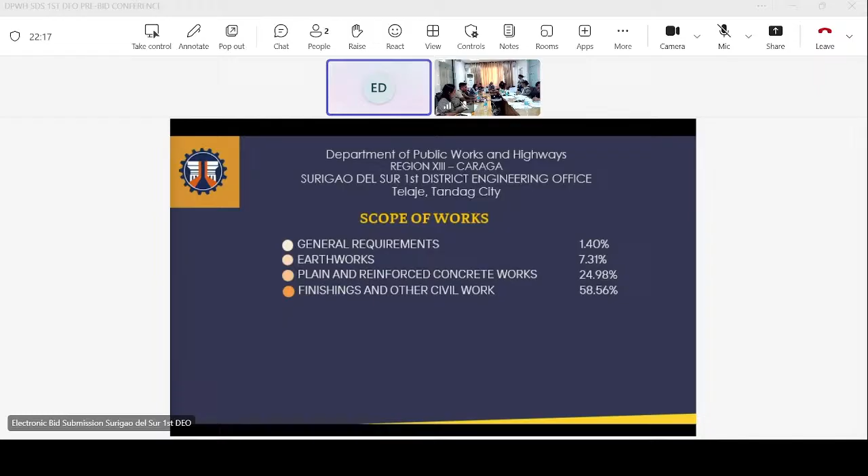Project scope: completion of multi-purpose building covered court. Project duration 193 calendar days. For the scope of works: general requirements 1.4%, earthworks 7.31%, plain and reinforced concrete works 24.98%, finishings and other civil works 58.56%, plumbing works 4.77%, electrical works 3.68%, with a total of 100%.

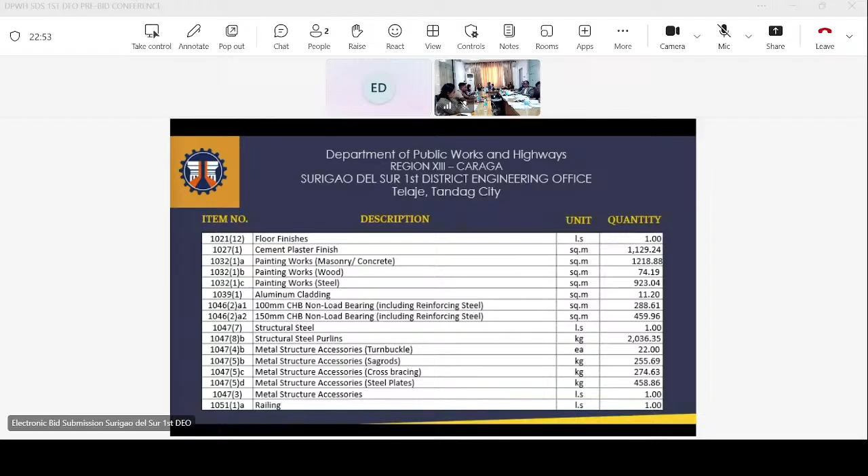For Part A, general requirements, Part B, earthworks, Part C, plain and reinforced concrete work, the item number, description, unit, and quantity are shown. For Part D, finishings and other civil works, the item number, description, unit, and quantity are shown. For Part E, plumbing works, Part F, electrical works, the item number, description, unit, and quantity are shown.

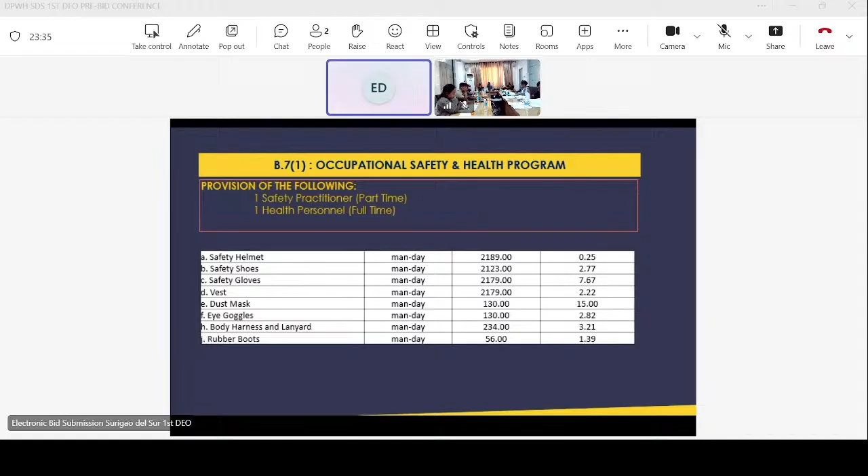For B.51 project billboard, we have 1 unit 4x8 DPWH tarpaulin and 1 unit 8x8 COA tarpaulin. For B.71 occupational safety and health program, we have 1 safety practitioner part-time and 1 health personnel full-time. The materials, unit, and quantity are shown. For the minimum equipment requirement, we have one dump truck.

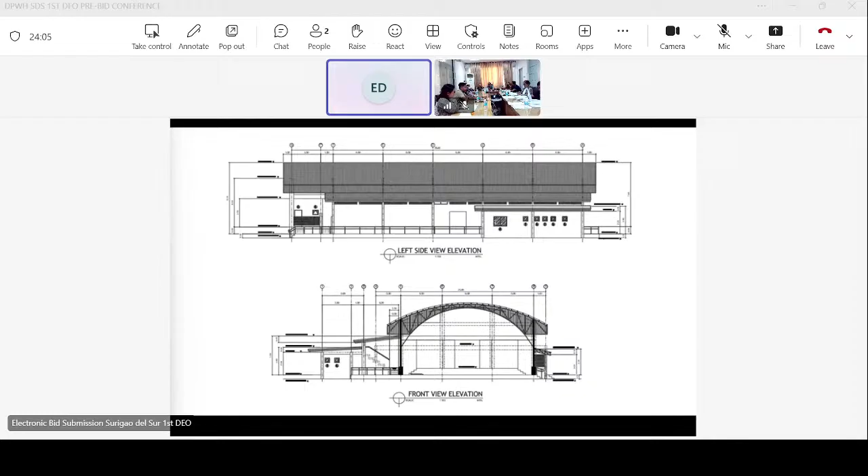For the plans, for the architectural, we have the perspective and site development plan, the floor plan, the left side view elevation and front view elevation, the rear view elevation and right side view elevation, longitudinal section B and cross section A, longitudinal section C and wire mesh window detail.

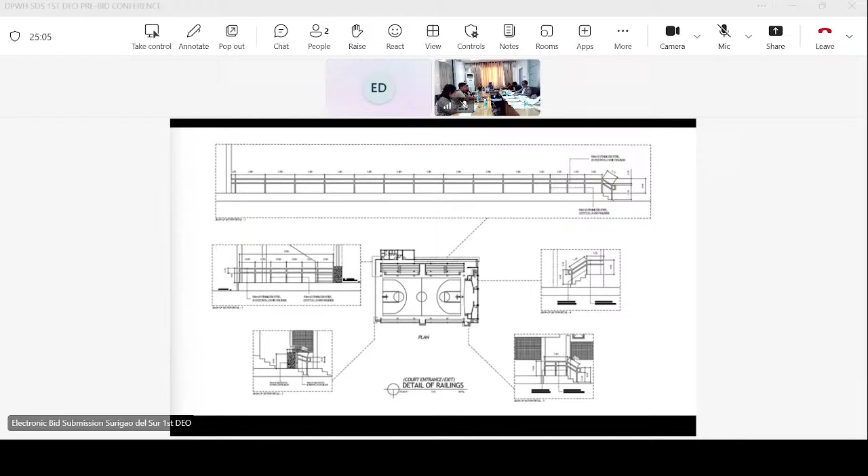Schedule of doors and windows. Reflected ceiling plan. Roof plan 1, roof plan 2, and roof plan 2. Ceiling typical detail. Detail of railings for the left side bleacher. Spot detail for the railings. Detail of railings for the court entrance and seat. The ceiling detail for the stage.

And for the structural, we have the foundation plan, the tie beam and wall footing plan, column footing details, tie beam section detail and stair footing details, wall footing, the roof beam plan, arc beam detail elevation and beam section detail and rafter details.

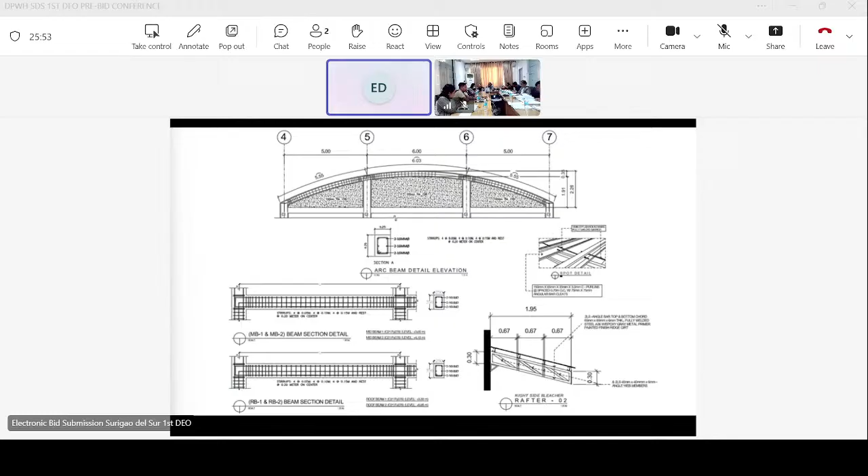The roof framing plan 1, roof framing plan 2, and roof framing plan 3. The ridge, girth, and full truss details. The steel girth, rafter, and half truss for the bleachers details. Section detail for the bleacher.

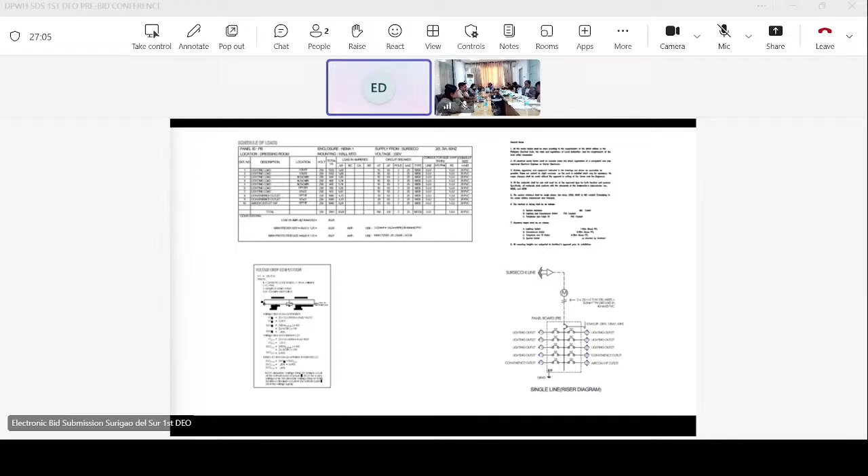For the plumbing plans, we have the water line layout plan, the sanitary line layout plan, storm drain layout plan, the septic tank, catch basin, service tank connection details. And for the electrical, we have the lighting layout plan, the power layout plan, and the schedule of loads and the single line riser diagram. That would be all, thank you.

Okay. Comment from the panel: from our pre-procurement, we have to include in the program of works the computation of calendar days. Then secure a resolution on the demolition of the existing building, care of the end user for the processing of the demolition permit. Then update plans of ceiling details. And then on BOQ, quantities of items of Part C must be changed based on the program of works. Then reflected on the BOQ must be DPWH-accredited project engineer and construction safety training certificate for safety officer.

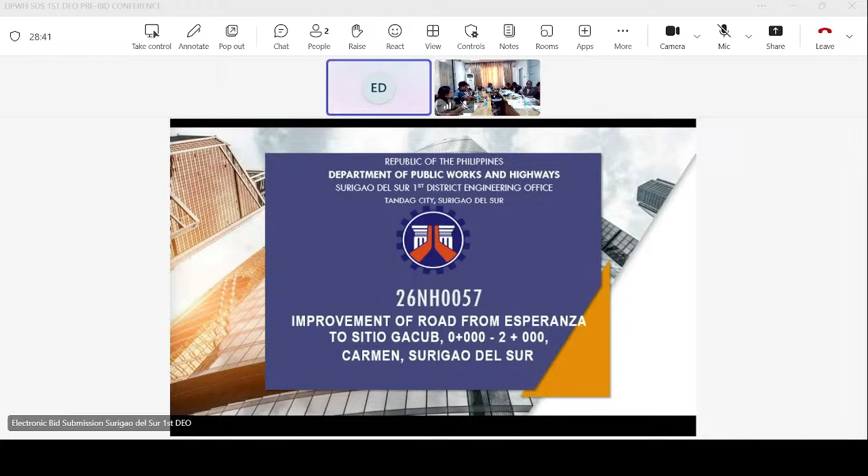Station 0+000 to 2+000, Carmen, Surigao del Sur. Appropriation 70 million, ABC 69,300,000, location at Carmen, Surigao del Sur.

For CW1, construction of concrete road, and CW2, construction of bridge. For construction of concrete road: facilities for the engineer 0.63%, general requirements 1.42%, earthworks 12.54%, sub-base and base course 4.85%, surface course 28.33%, drainage and slope protection structure 20.35%. For CW2, construction of bridge: drainage and slope protection works 2.64%, miscellaneous 1.81%, materials details 0.02%, total 100%.

Project length for road is 1.97 kilometers, for bridge 30 meters. Project scope: road and bridge. Contract duration 138 calendar days. Date of bidding July 22, 2026.

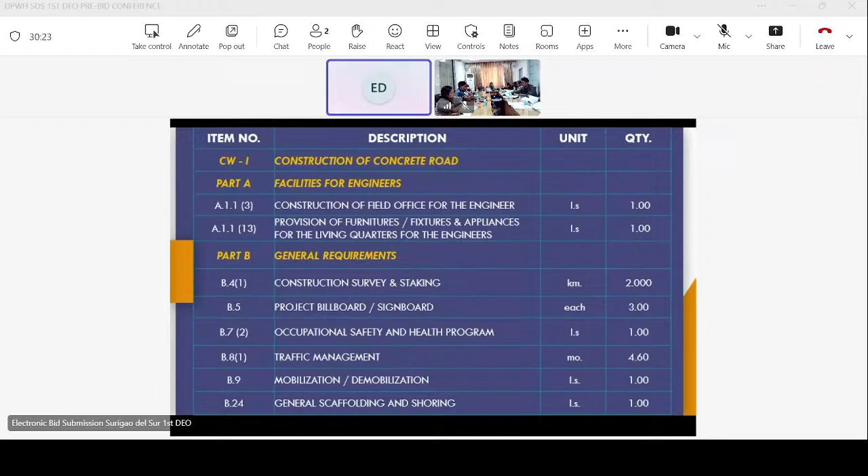For CW1, construction of concrete road: Part A, facilities for the engineer; Part B, general requirements. The item number, description, unit, and quantity are being shown.

Breakdown for construction of field office for the engineer: 1 unit field office bunkhouse type, and for B.5, project billboard/signboard: 3 units 4 feet by 8 feet tarpaulin for DPWH, 3 units 8 feet by 8 feet tarpaulin for COA.

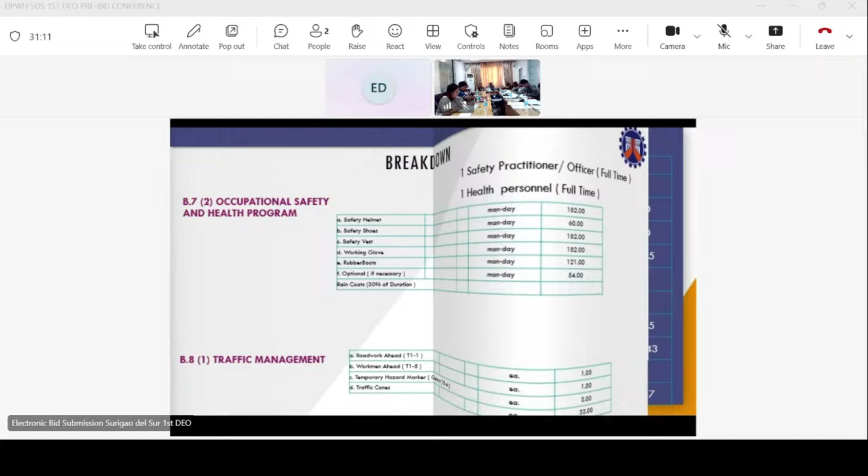For Part E, surface course, and Part F, drainage and slope protection structure, the item number, description, unit, and quantity are being shown.

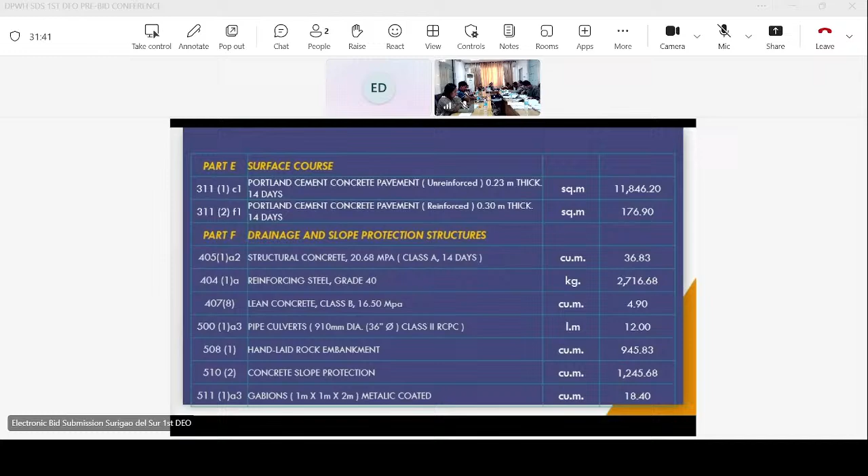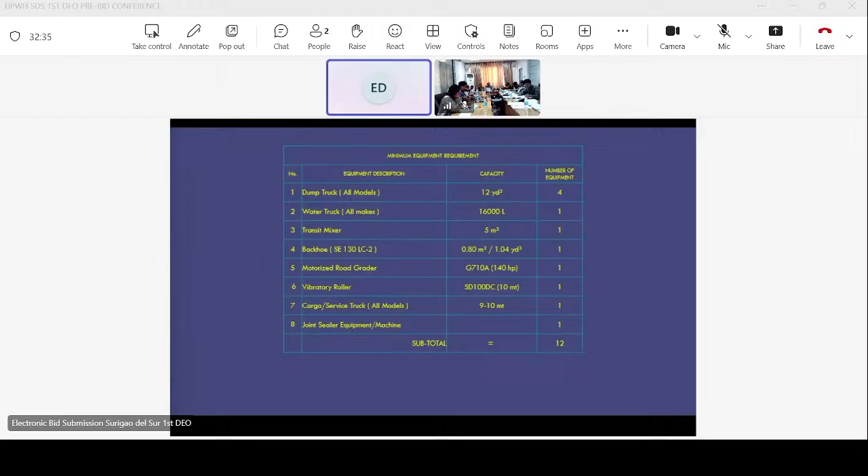For minimum equipment requirement, we have 4 units dump truck, 1 unit water truck, 1 unit transit mixer, 1 unit backhoe, 1 unit motorized road grader, 1 unit vibratory roller, 1 unit cargo service truck, and 1 unit joint sealer equipment machine.

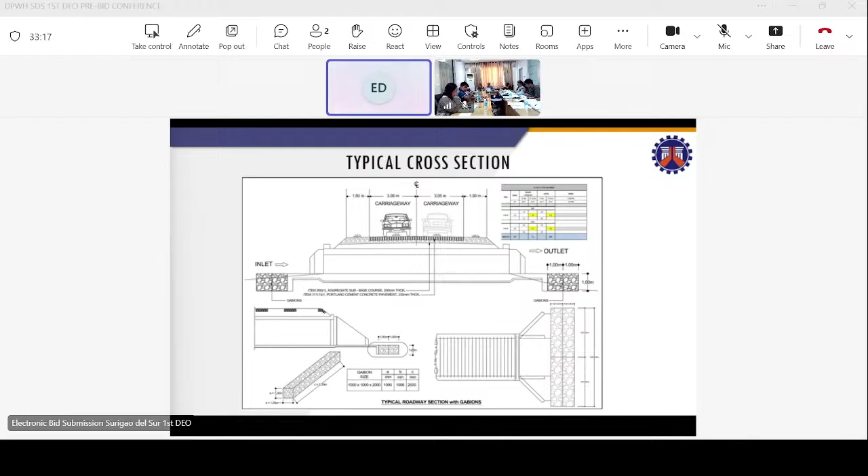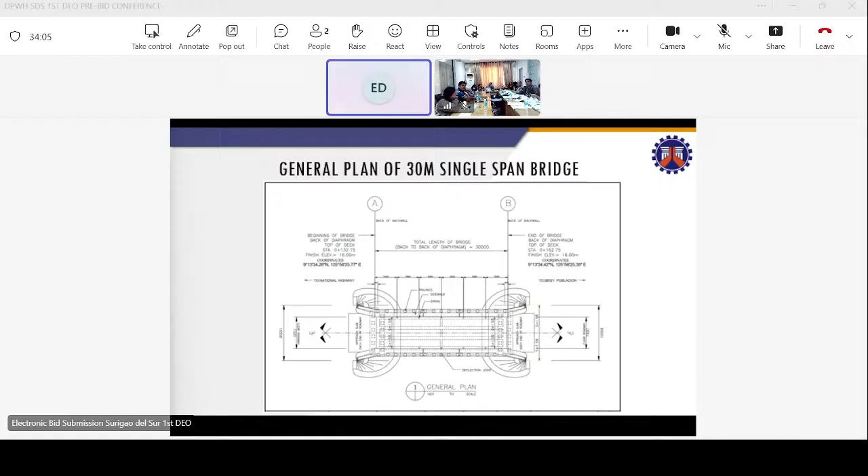General plan of 30 meters single span bridge. And 30,000. So, is this the point?

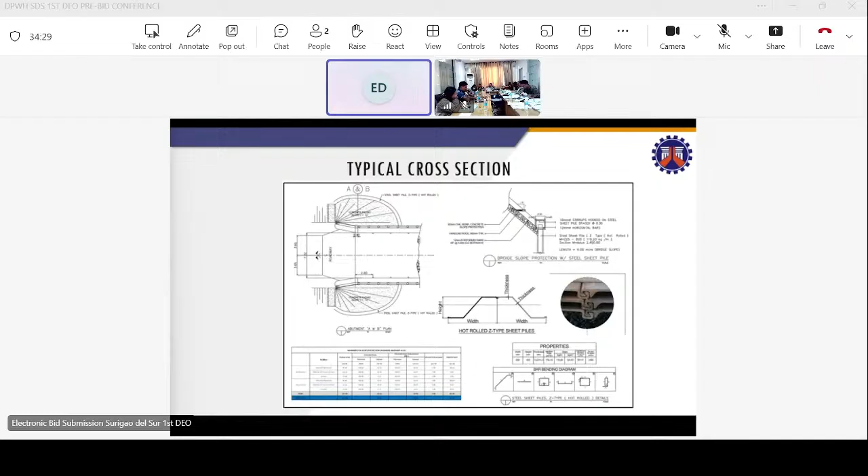For plan and profile, station beginning at station 0+00, and at station 2+012. That's all, sir.

Coming from the people: from our pre-construction proceedings, we have provided gabions as protection on the side of the apron, end to the outlet and inlet of the box culvert, in replacement of concrete shoulder.

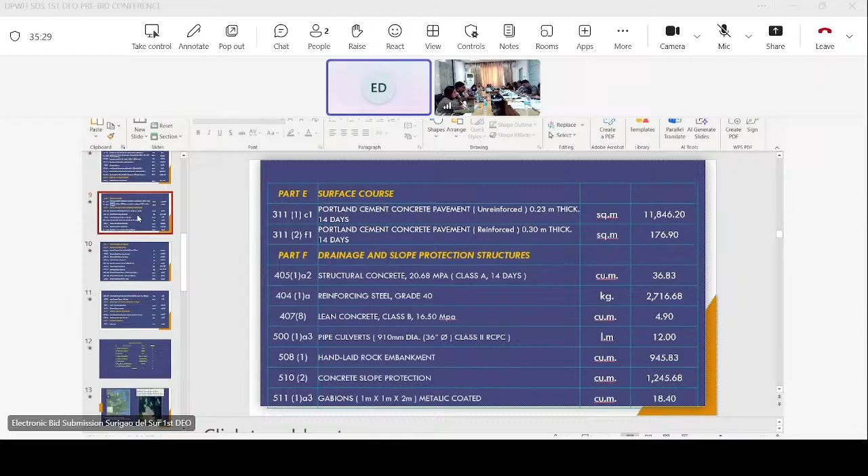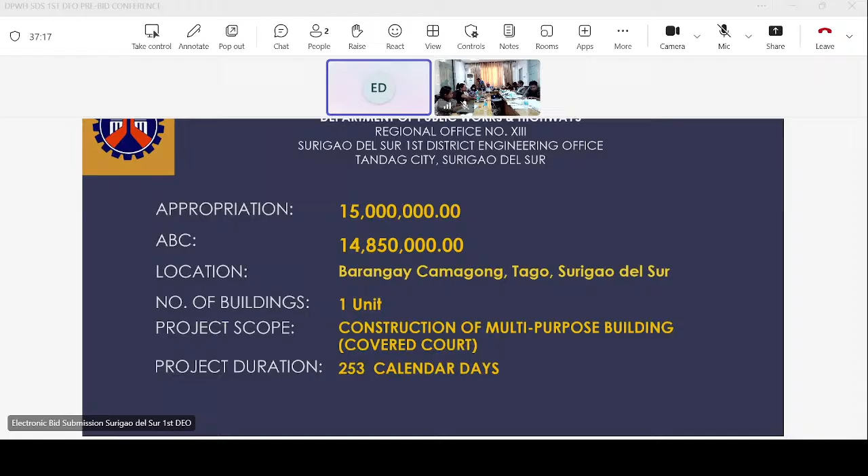Scope of work: general requirements 1.25%, earthworks 11.14%, plain and reinforced concrete work 33.95%, finishing and other civil works 47.90%, plumbing works 3.51%, electrical works 2.24%, with a total of 100%.

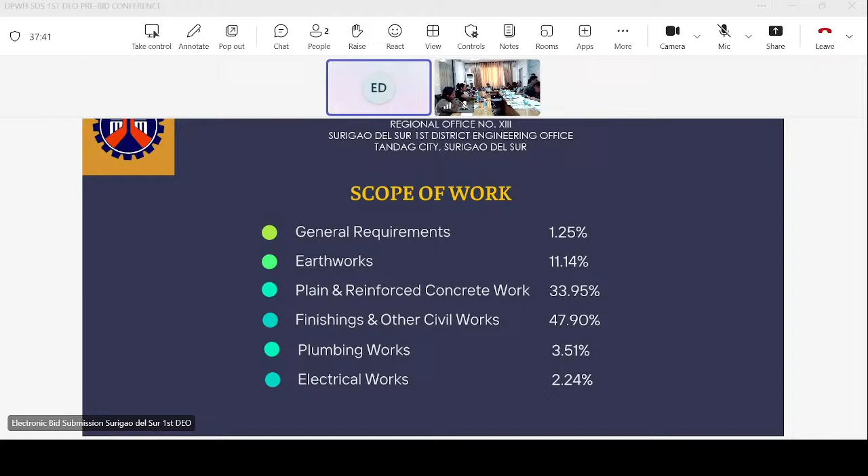For Part A, general requirements, Part B, earthworks, Part C, plain and reinforced concrete work, the item number, description, units, and quantities are as shown.

Next, for Part D, finishings and other civil works, Part E, plumbing works, and Part F, electrical works. The item number, description, units, and quantities are as shown.

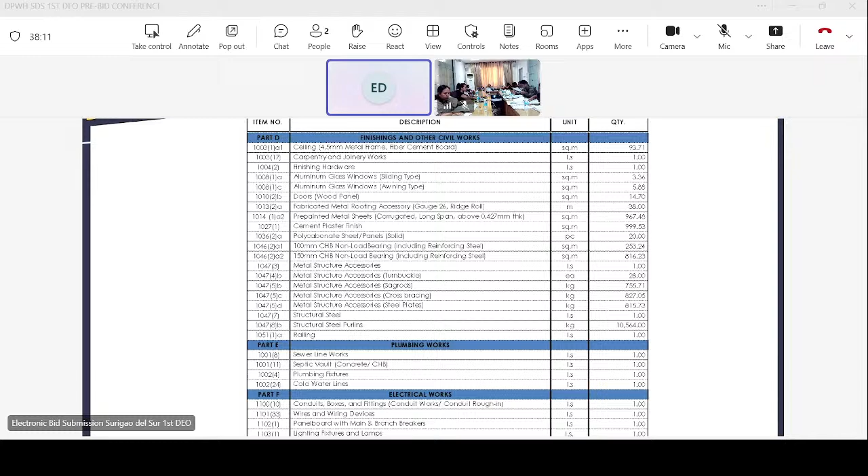For minimum equipment requirement, we have 1 dump truck.

Breakdown for permits and clearances, we have BFP, zoning, master plumber, and PEE.

For project billboard, we have 1 unit, 4x8 DPWH tarpaulin backed with marine plywood and 1 unit 8x8 COA tarpaulin backed with marine plywood.

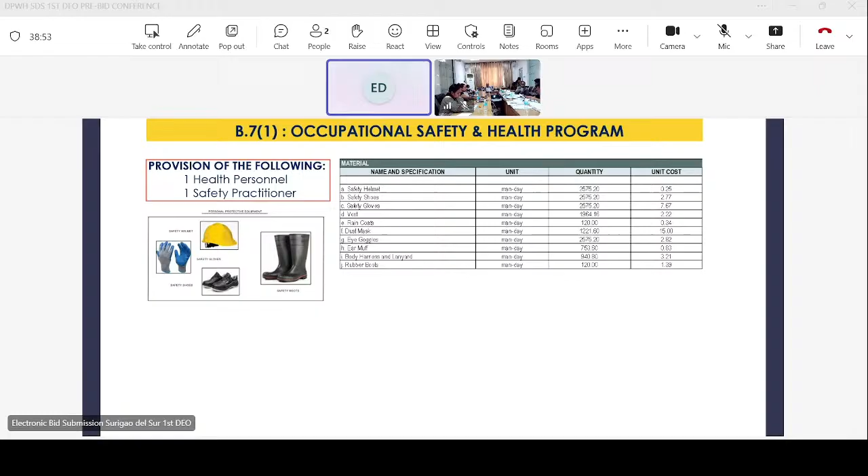For occupational safety and health program, provision of the following: 1 health personnel, 1 safety practitioner. Materials, name and specification, units and quantities are shown.

For architectural plan, we have perspective, site development plan, vicinity map, the table of contents.

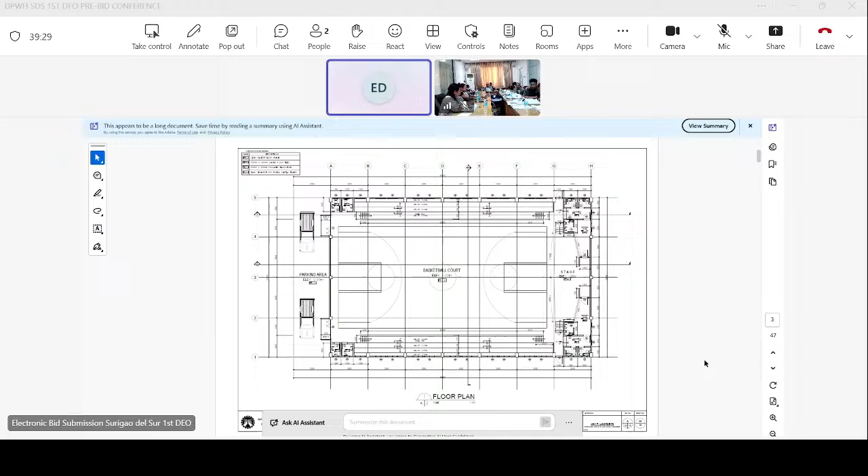Next, we have the floor plan, front elevation, left side elevation, rear elevation, cross section AA.

Longitudinal section BB, longitudinal section CC, schedule of doors and windows, reflected ceiling plan, the isometric ceiling detail, and upper fixed glass detail, polycarbonate detail.

Stage ceiling framing plan, ceiling framing 1 and 2, the isometric ceiling frame, walkway railing detail, ramp railing detail, and stair railing detail.

Next, we have the roofing plan. For structural, we have foundation plan, footing schedule, column footing details.

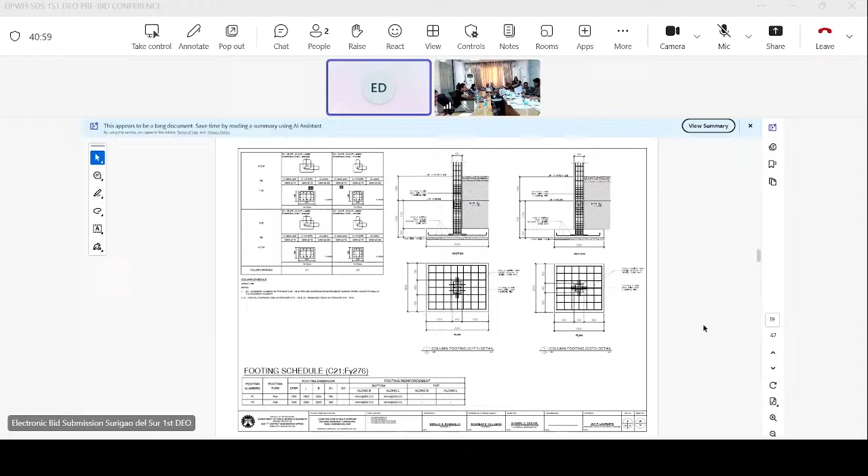Next, we have grade beam plan, grade beam schedule, and the typical detail of footing, wall footing.

Next, we have the mid beam plan, mid beam schedule and wall footing detail.

Roof beam plan, roof beam schedule, the upper roof beam plan, upper roof beam schedule.

Bleacher detail section and lintel beam detail, stiffener column detail, and canopy detail.

Next, we have the roof framing plan, truss 1 detail, truss 1A detail.

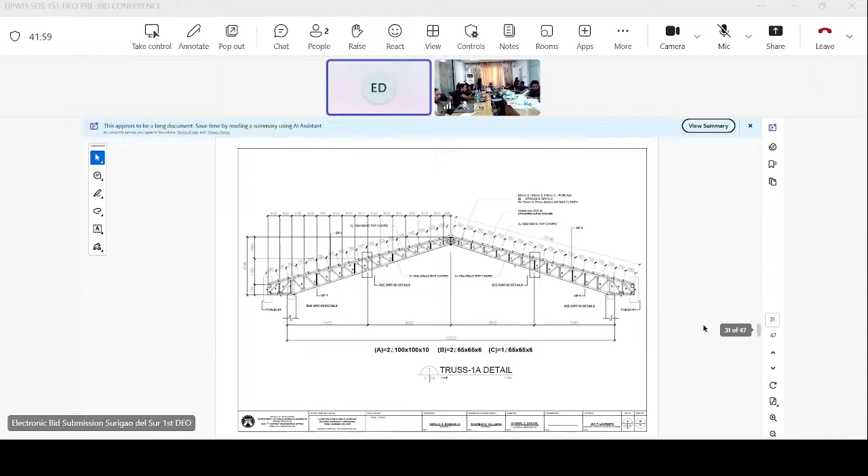Next, we have the fascia detail 1 and 2, girt detail 1, 2, and 3.

Next, we have the C-purlin details, roof panel side lap details, detail of purlin splice, detail of sag rod, connection of cross bracing.

Base plate detail, gusset plate detail.

Next, for plumbing, we have water line layout, isometric view for water line layout, sewer line layout.

Isometric view for sewer line layout, storm drain and downspout layout, isometric view for storm drain and downspout layout.

Next, we have the septic tank detail and section, and catch basin detail and section.

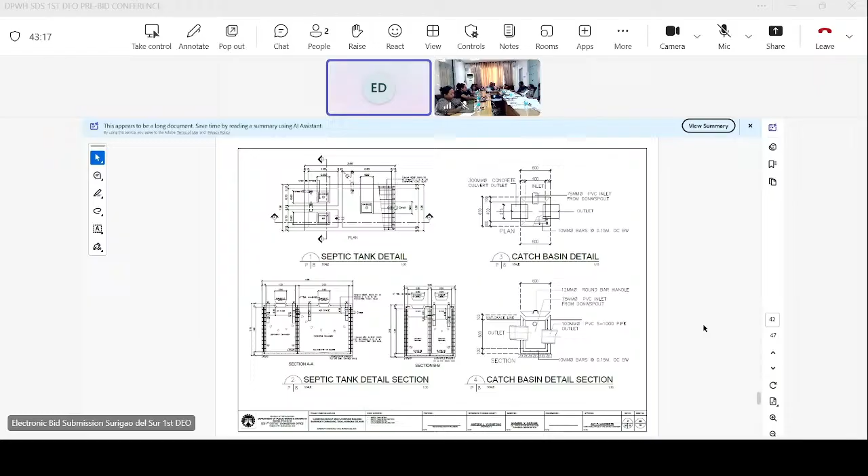Next, for electrical plan, we have electrical lighting layout, the electrical power layout, schedule of loads, voltage drop computation, single line riser diagram.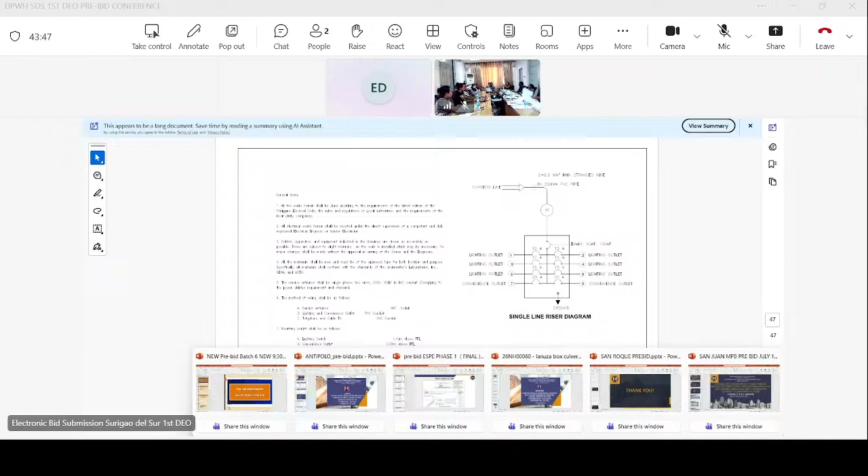Comment from Mark Repro: the only comment is to include in the program of works the computation of calendar days.

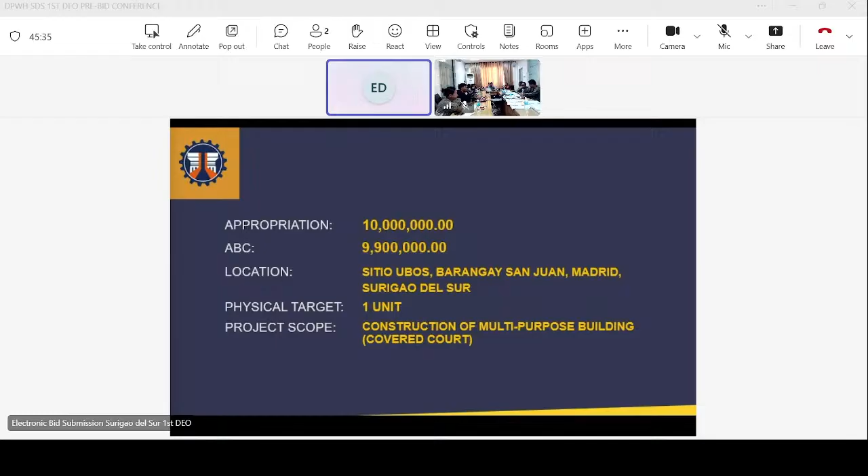Appropriation of 10 million and ABC of 9,900,000, and location at Sitio Ubos, Barangay San Juan, Madrid, Surigao del Sur. Physical target of 1 unit and project scope of construction of multi-purpose building covered court. Project duration of 183 calendar days.

For our scope of works, we have facilities for engineer 1.46%, general requirements 2.38%, earthworks 2.60%, plain and reinforced concrete works 30.62%, finishing and other civil works 55.68%, electrical works 2.36%, plumbing works 3.35%, and mechanical works 1.54%, for a total of 100%.

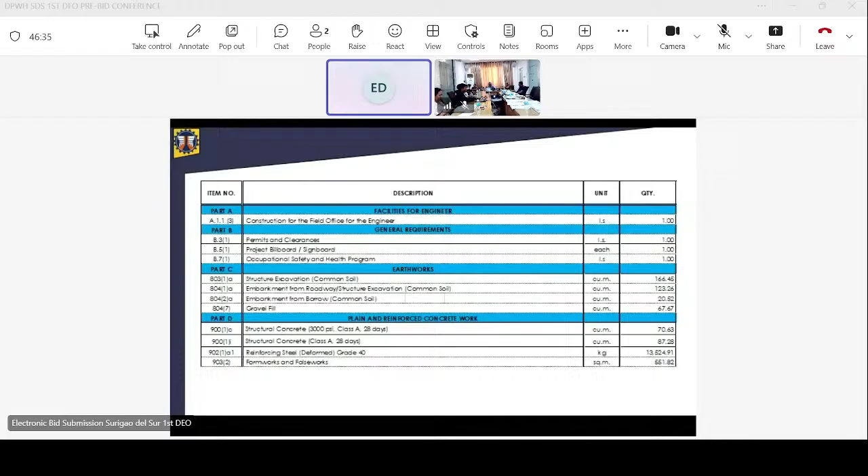For our scope, we have item number, description, unit and quantity for Part A, facilities for engineer. Part B, general requirements. Part C, earthworks. Part D, plain and reinforced concrete works. Part E, finishing and other civil works.

Part F, electrical works. Part G, plumbing works, and Part H, mechanical works.

For minimum equipment requirement, we have 1 unit of dump truck, 12 cubic yards. For B.51 project billboard, 1 unit of 4x8 DPWH tarpaulin and 1 unit of 8x8 COA tarpaulin.

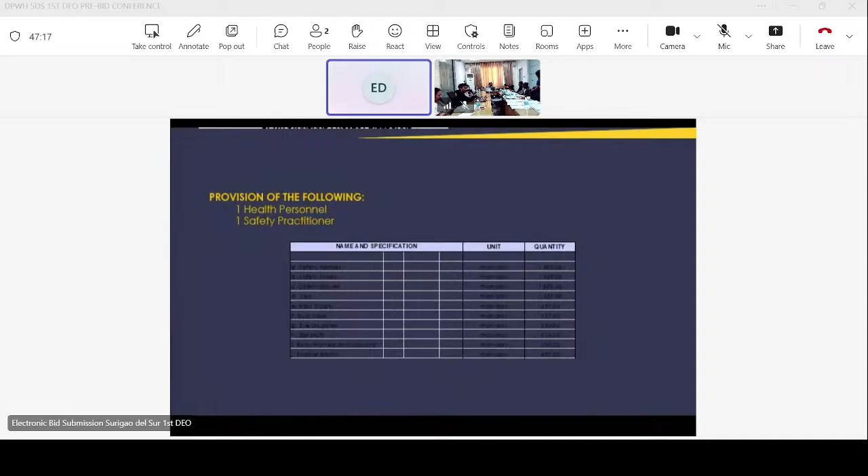For B.71 occupational safety and health program, provision of the following: 1 health personnel and 1 safety practitioner. For materials, name and specification, unit and quantity are as shown.

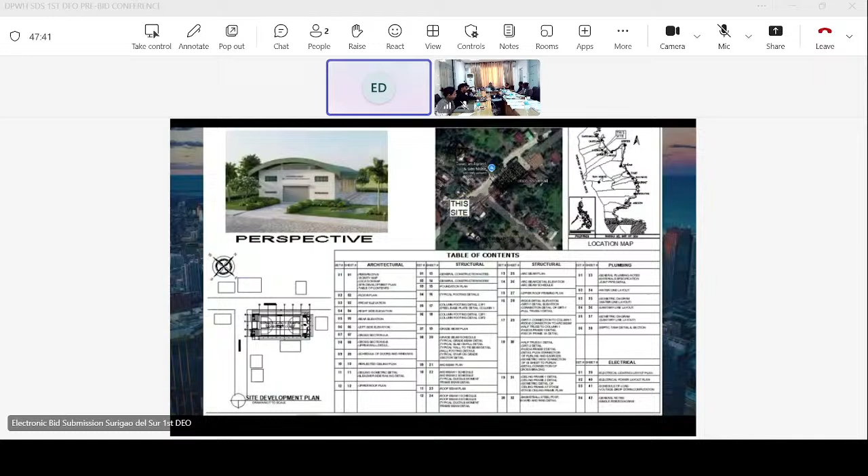For our plans, architectural plan, we have the perspective, site dev, and the location map. For floor plan.

Front elevation, right side elevation, rear elevation, left side elevation, then cross section through AA, then upper wall detail and cross section through BB. We have the schedule of doors and windows, reflected ceiling plan, and ceiling typical detail and bleacher side railing detail, then upper roof plan.

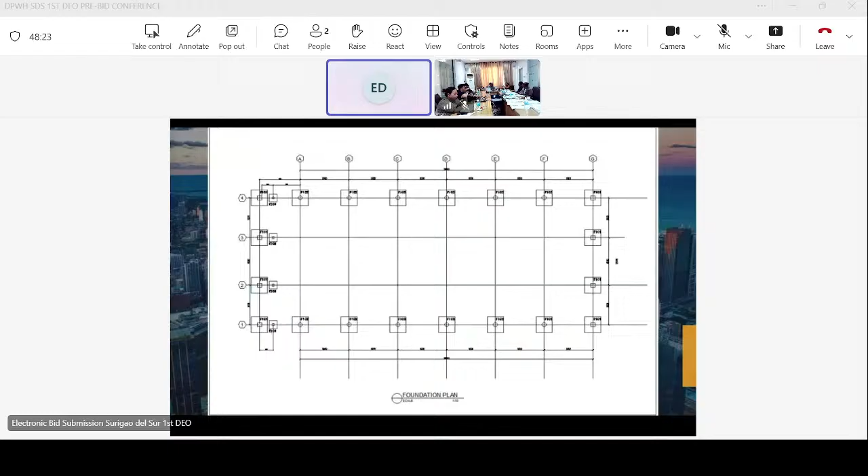Then for our structural plans, we have the foundation plan, typical footing details, and bleacher detail section, column footing detail C1F1 and steel base plate detail, and column footing detail C2F2 and C2F1.

Grade beam plan and grade beam schedule, typical grade beam detail, typical stair on grade section detail, and stiffener column detail.

Roof beam plan, arc beam plan, arc beam detail elevation, arc beam schedule, canopy detail, lintel beam, and LB01 beam detail section.

Upper roof framing plan, ridge detail elevation, girt 1 detail elevation, connection detail of girt 1, and full truss 1 detail.

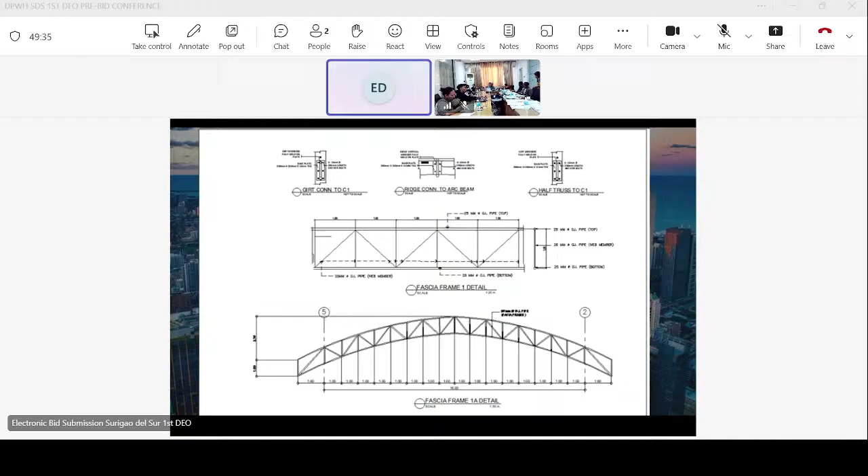Girt connection to C1 and ridge connection to arc beam, half truss to C1, fascia frame 1 detail, fascia frame 1A detail, detail of purlin splice, subgrade section details, detail connection of cross bracing at column, girt 2 detail at bleacher, and detail connection of cross bracing.

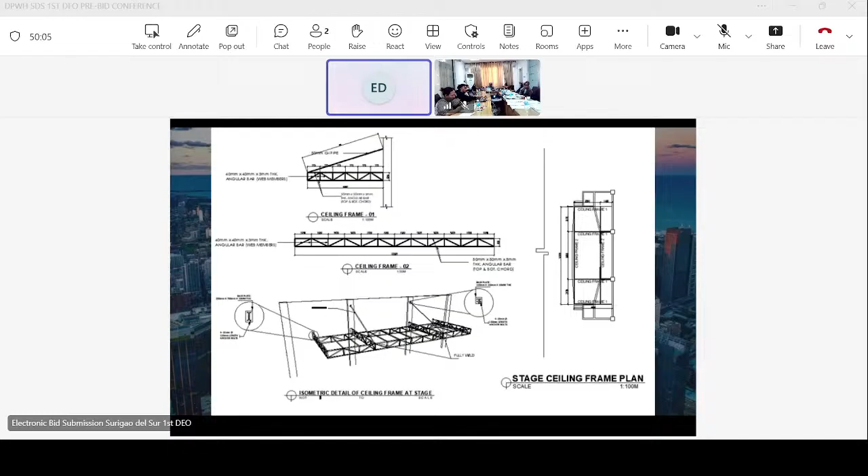We have the ceiling frame 01 and 02, isometric detail of ceiling frame at stage, stage ceiling frame plan, and basketball steel post, board, and ring detail.

Next is the plumbing plan. We have the waterline layout plan, isometric of waterline layout plan, sanitary line layout and isometric view of sanitary line layout, and septic tank detail and detail section.

For the electrical plan, we have the electrical lighting layout plan.

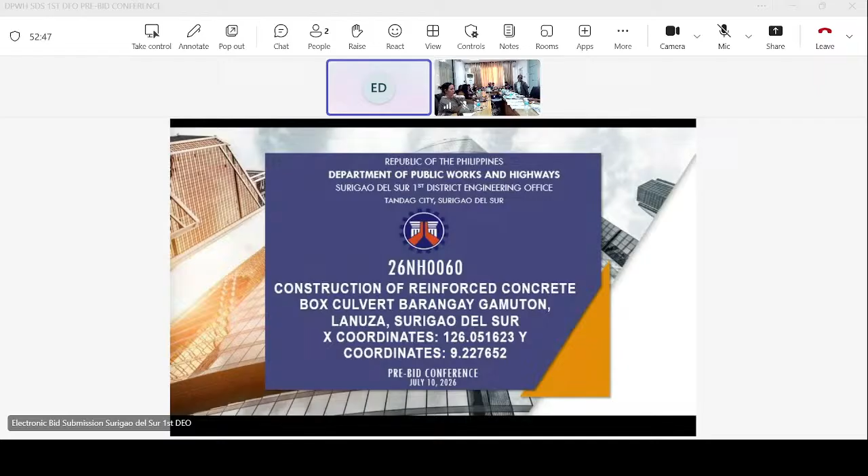So the location of the project is Lanuza, Surigao del Sur. Project length is 30.0 lineal meters. Project scope: construction, drainage, reinforced concrete box culvert. Contract duration is 73 calendar days. And the date of bidding is July 22, 2026.

So for the project financial information, the approved appropriation for this project is 6,000,000, and the ABC is 5,880,000. So the cost distribution for this project: for Part A, facilities for the engineer, 1.87%; Part B, other general requirements, 1.64%; earthworks, 10.26%; surface course, 6.03%.

Lastly, the drainage and slope protection works, 80.19%. So this reflects that most of the project cost is allocated to the drainage and slope protection works.

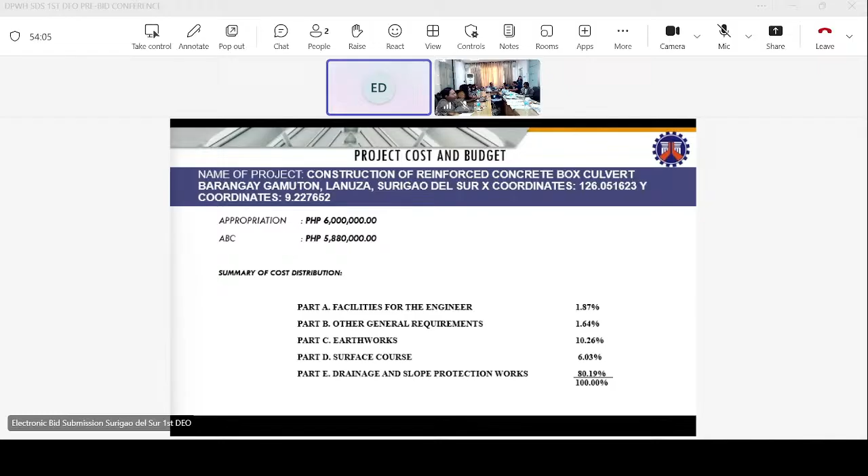So bidders are advised to carefully review the BOQ and the technical detailed specifications.

So under general requirements, we have B.5. The contractor is required to provide signages, specifically 1 unit 4x8 tarpaulin for DPWH and 1 unit 8x8 tarpaulin for COA.

So under other general requirements is B.7 (2), the occupational safety and health program, specifically 1 unit safety officer, full-time. And for B.8 (1), traffic management, name and specification, unit, and quantities are shown.

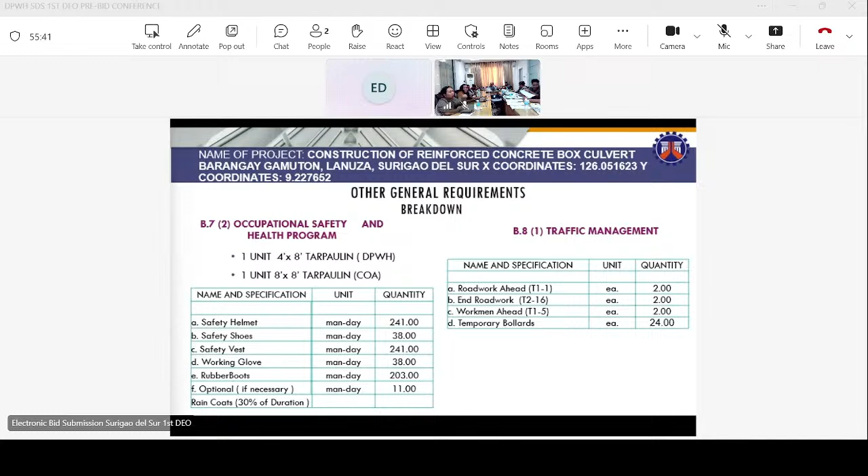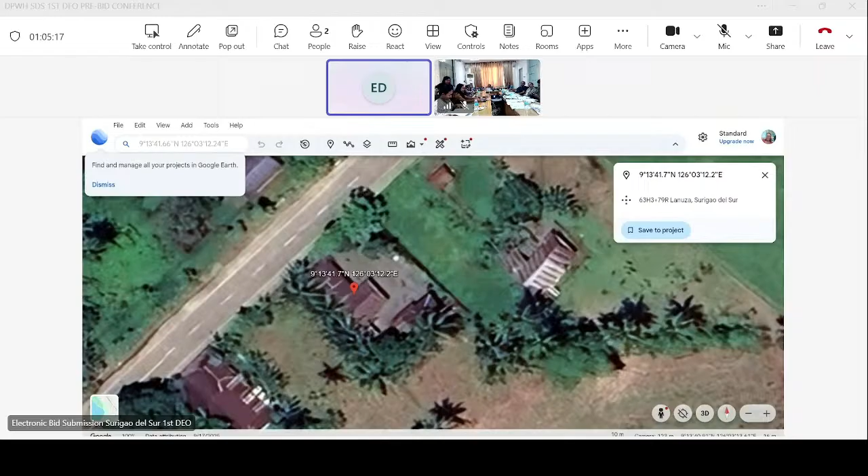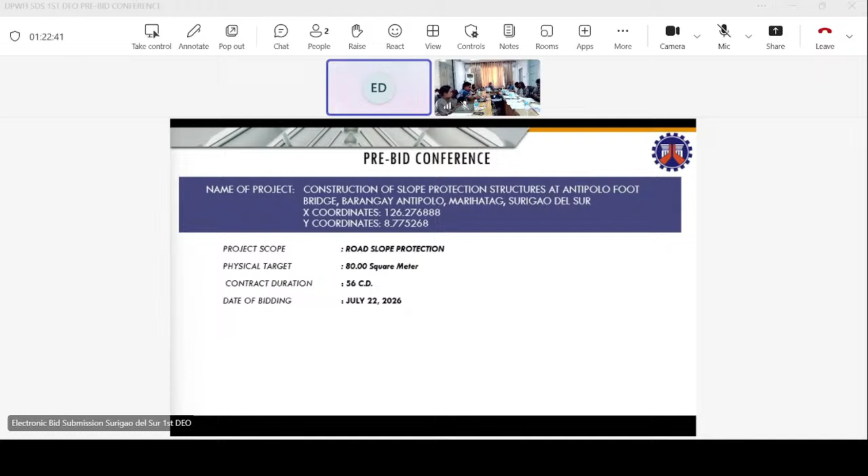Project scope: road slope protection, physical target 80 square meters, contract duration 56 calendar days, date of bidding July 22, 2026.

For Part A, facilities for the engineer, and Part B, general requirements, the item number, description, unit, and quantity are being shown.

For construction of field office for the engineer, we have 1 unit field office, bunkhouse type.

For B.5 project billboard signboard, 2 units 4 feet by 8 feet tarpaulin for DPWH, then 2 units 8 feet by 8 feet tarpaulin for COA.

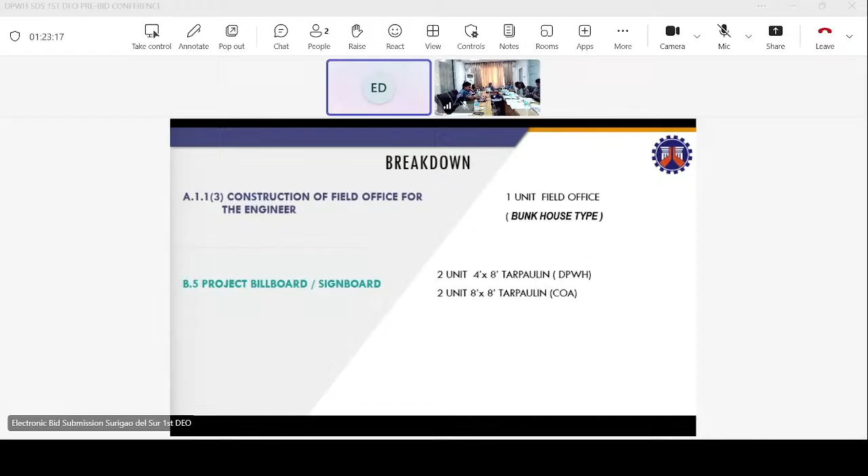Breakdown for occupational safety and health program and traffic management, the materials, unit, and quantity are as shown.

Part C, earthworks. Part D, sub-base and base course. Part E, surface course. The item number, description, unit, and quantity are being shown.

For Part F, drainage and slope protection structure, the item number, description, unit, and quantity are as shown.

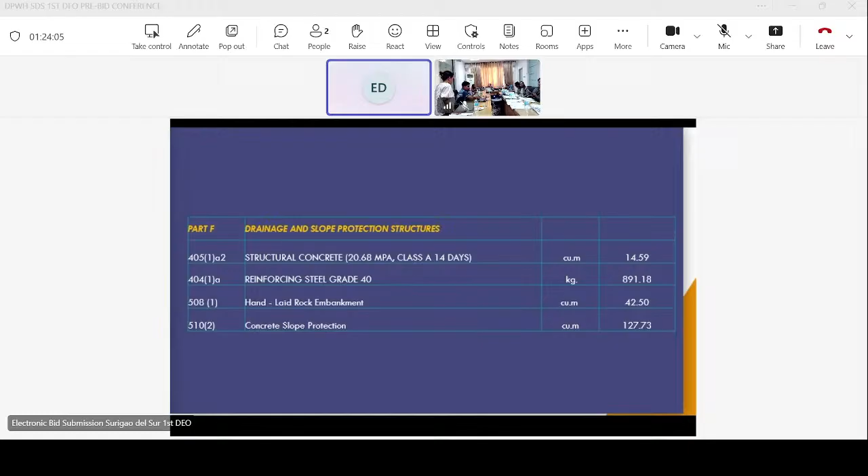For minimum equipment requirement, you have 4 units dump truck, 1 unit water truck, 1 unit transit mixer, 1 unit backhoe, 1 unit motorized road grader, 1 unit vibratory roller, and 1 unit joint sealer equipment machine.

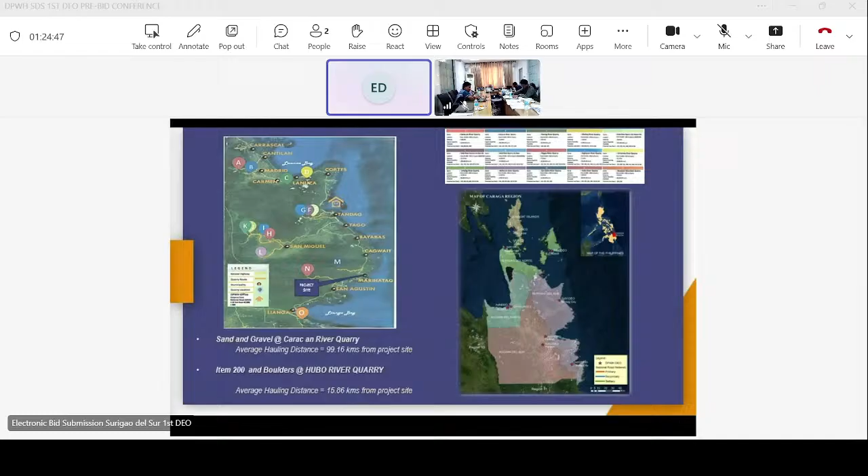For sand and gravel, Caracan River Quarry, average hauling distance 99.16 kilometers from project site. And item 200, boulders at Hubo River Quarry, average hauling distance 15.06 kilometers from project site.

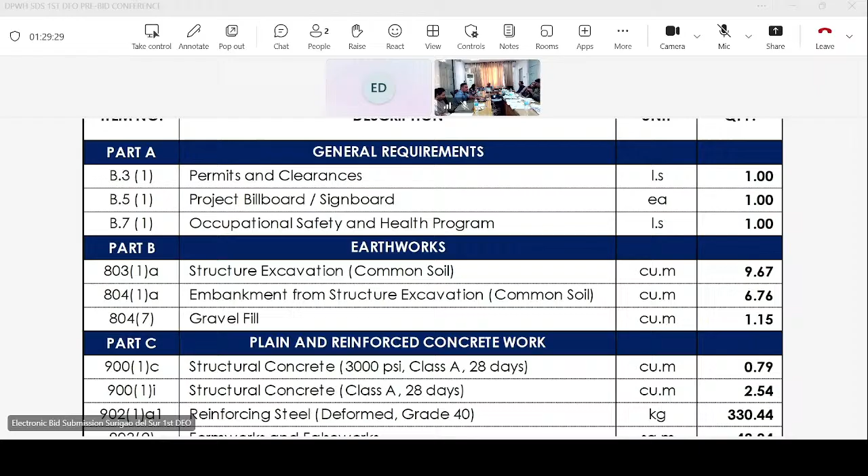Part E, plumbing works. Part F, electrical works. The item number, description, unit, and quantity are being shown.

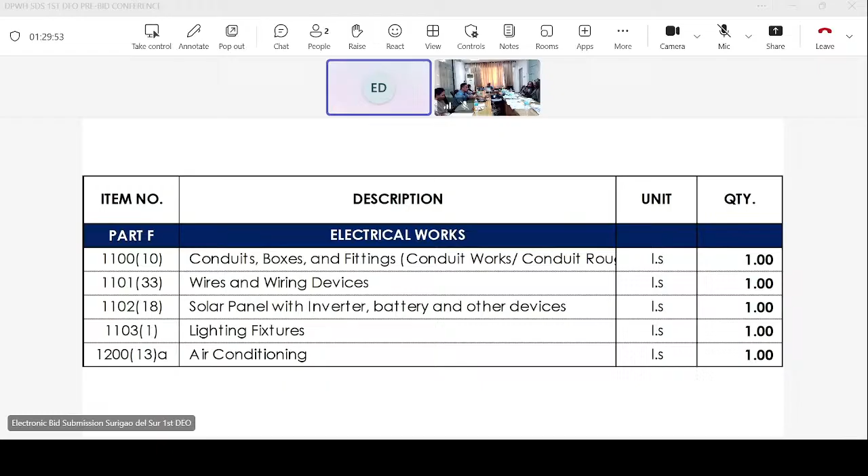For the minimum equipment requirement, we have 1 dump truck, project billboard, 1 unit 4x8 DPWH tarpaulin, and 1 unit 8x8 COA tarpaulin. For the occupational safety and health program, we have 1 health personnel and 1 safety practitioner.

Now let's proceed to the plans. First, architectural plans: perspective, site development plan, and vicinity map. Ground floor plan and second floor plan. Front elevation, left, rear, and right elevation plan. The cross-section through AA and longitudinal section through BB, blow-up plan for porch, and ceiling isometric detail.

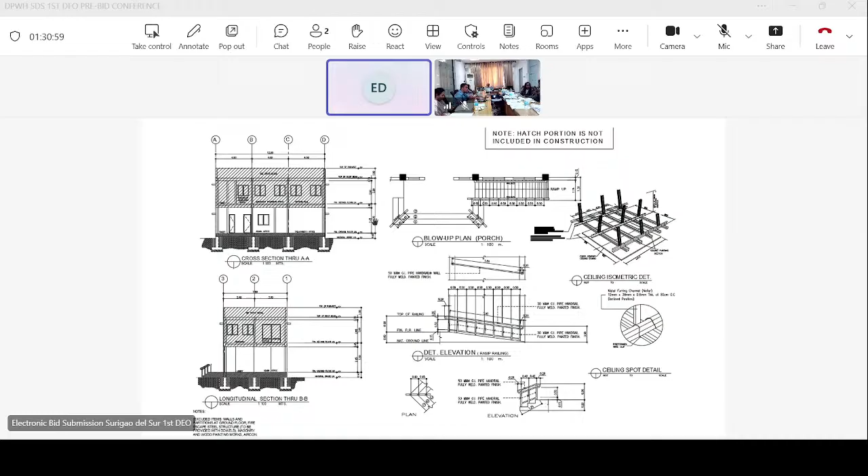Doors and windows, structural plans, general construction notes, fire exit foundation plan, the ground floor, second floor, concrete pedestal detail and concrete pedestal elevation, fire exit floor framing plan, and framing spot detail.

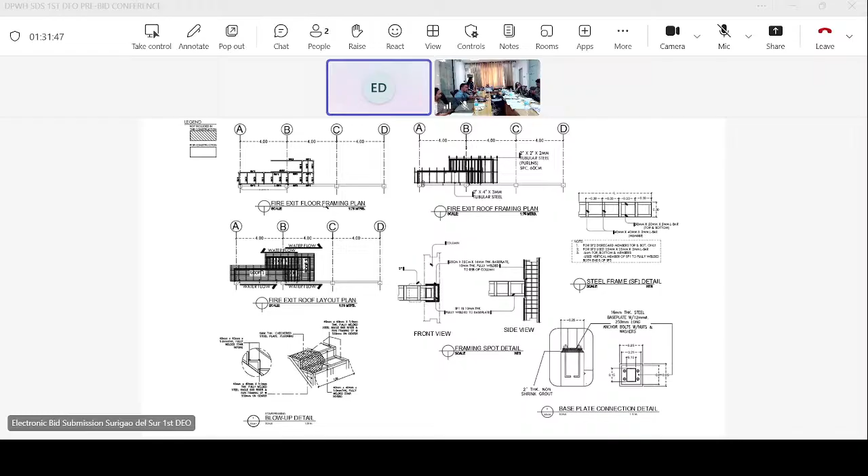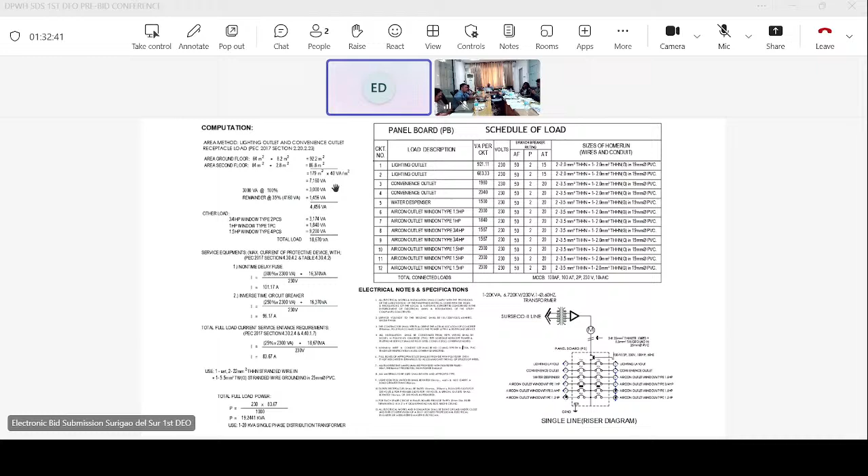For plumbing plans: sanitary line, storm drain, water line, and catch basin detail. The isometric view for sanitary and storm drain. Water line isometric diagram. Electrical plan, lighting and layout plan, power layout plan. Computation of loads and single line riser diagram. Solar panel.

That's all, sir, in the presentation.

Okay, comment: Pre-proposal, we have to update plans of ceiling details, then provide signage or logo of the barangay. Include in the program of works the computation of calendar days.

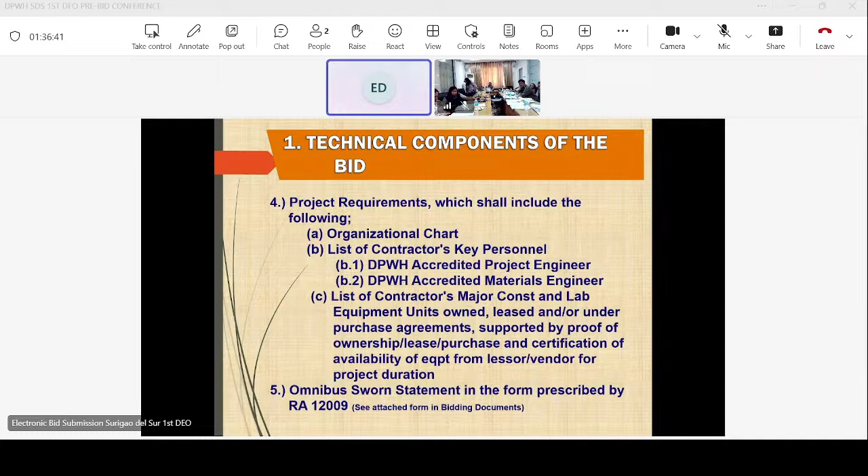Omnibus sworn statement in the form prescribed by RA 12009. See attached form in the posted bidding documents.

The latest general information sheet or GIS reflecting the beneficial ownership including BOI duly received by the Securities and Exchange Commission or SEC for corporations, sworn affidavit of eligibility and beneficial ownership. The following template attaches Annex A for all bidders, including sole proprietorship.

Then the integrity pledge for DPWH contractors. See the attached form on the posted bidding documents.

For the financial component of the bid: first, the duly signed financial bid form in accordance with the form prescribed in bidding documents per RA 12009. Duly signed bid prices in the bill of quantities.

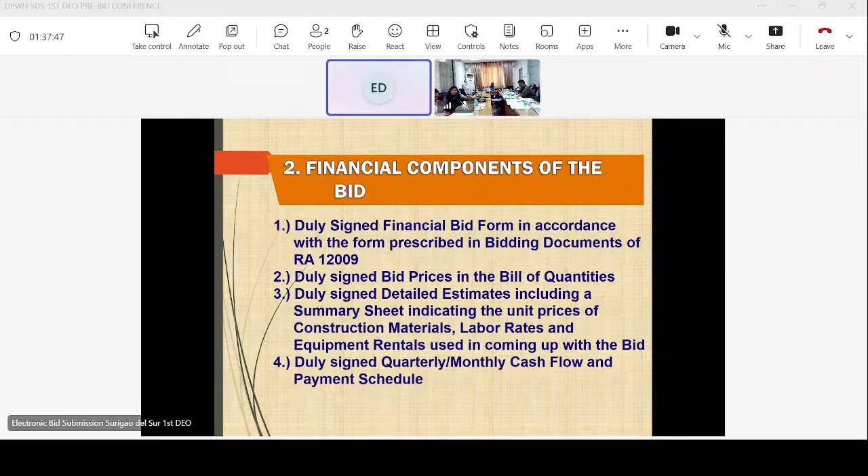Duly signed detailed estimates including summary sheet indicating the unit prices of construction materials, labor rates, and equipment rentals used in the bid. Duly signed quarterly, monthly cash flow and payment schedule. Thank you.

So for today's pre-bid conference, only two projects have a bid bulletin: project 26 and 80060. So subject for verification of location based on the coordinates reflected on the GAA.

And then for 26 and 80061, change item for 0518 description. That's...